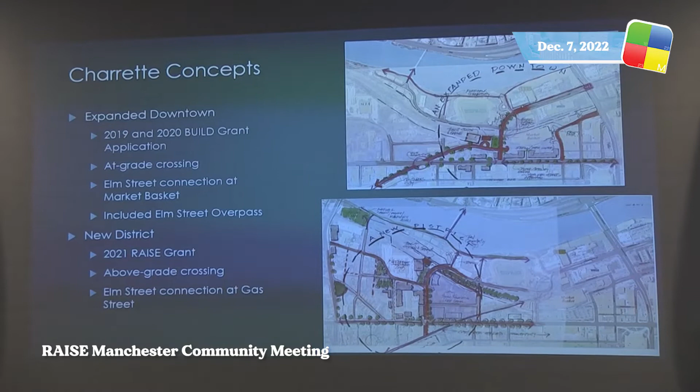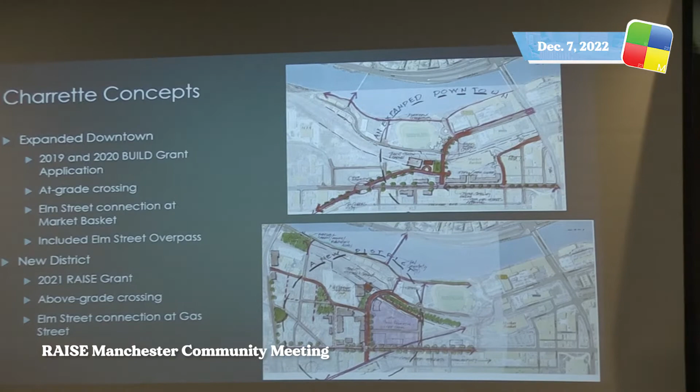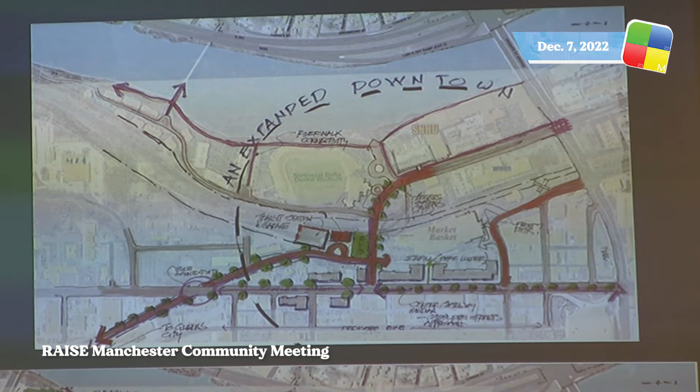These were sketches that were actually done at that 2019 charrette by the team. The first one, which was the essence of our 2019 application to the feds for this kind of funding, was what we called the expanded downtown scheme, on the top, which has the ability to support a future rail station, a transit hub right in that area, has the ability to have more housing, connects some of the streets that are missing their connections up to Elm Street, but had an at-grade crossing. So really key, the rail lines run through there and cut it off, and so that had an at-grade crossing.

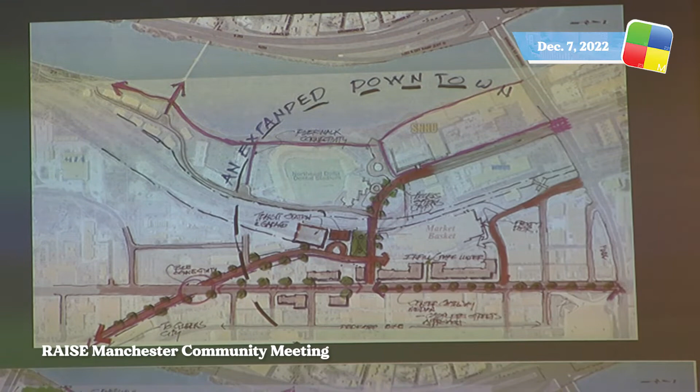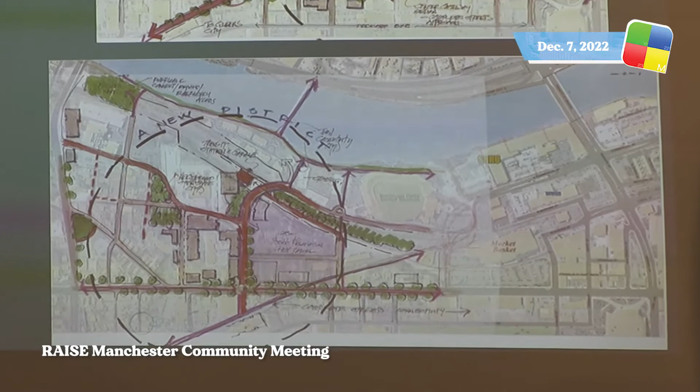As we moved forward for the next 2 years of applications for federal funding, the biggest feedback we got was, can you do it with an above-grade crossing that separates vehicles, pedestrians, and bikes out of the railroad corridor and reconnects to the rest of town? And so that's the new district scenario that's on the bottom. And that's exactly what went forward into our federal grant applications.

And I think that's a really important theme, is that we've stayed true to those initial ideas that came out in our design charrette. The other thing that happened during the initial charrette, but also during our whole process of the grant applications, was collaborating with other agencies.

This wasn't just DPW or just the city. There was a lot of partnership going on here. So this integrated with the transit-oriented development plan, in the sense of where did they have goals that might mesh with these funding goals. A really important partner was the Southern New Hampshire Planning Commission, which was with us every step of the way.

But it also ties into the whole Capitol Corridor project for rail, ties into the Transit Authority, which has a facility in this area and needs to be integrated, and works with all sorts of regional planning and local planning as well. So there was a lot of work over 3 years to make sure this worked with everybody's goals.

And so all of that led to this application to the federal government, to the U.S. Department of Transportation, for what is now known as a RAISE grant. For the couple of years prior, it had been called a BUILD grant, but I think it's important to recognize this is a program that's been around at USDOT for about 20 years. They were called Tiger grants for a long time.

And what they're looking for is really critical. It's not a typical grant. There was a pool of 1.5 billion available in the 2021 round.

The city put in a very competitive application, and the key is they're looking for surface transportation infrastructure projects that have a significant local or regional impact, with a focus on job creation, job maintenance, on really enabling people and communities economically, improving safety at the same time. I call it sort of a jujitsu grant - you have to do 5 things all at the same time and flip it. And then the other key is it has to have innovative transportation technology built into it, and it has to address racial inequalities that have been around for a long time and build in climate.

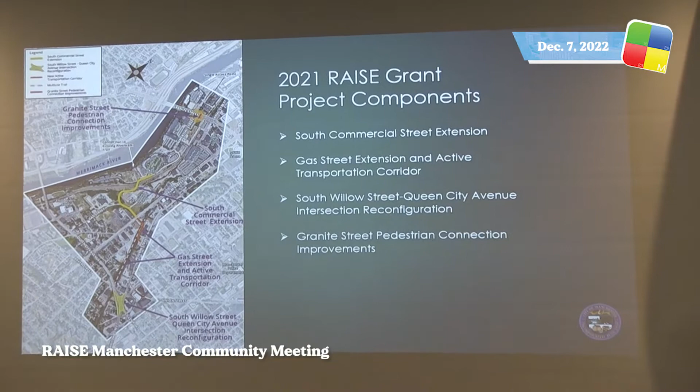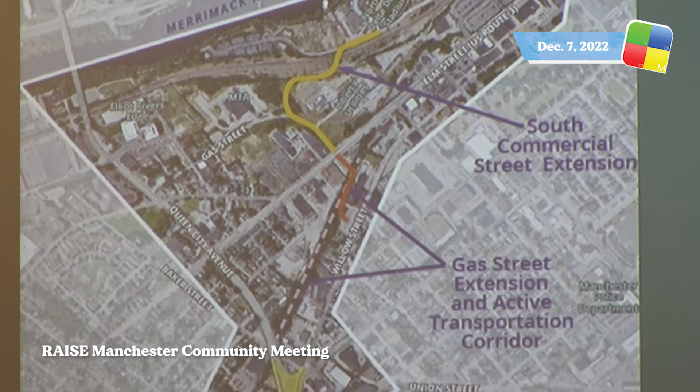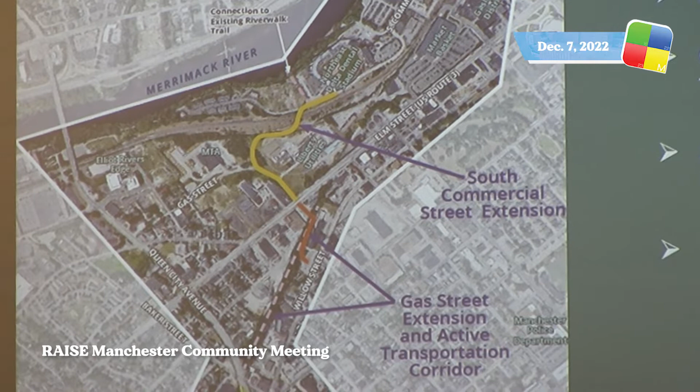The yellow line, starting where Fisher Cats will dead-end cul-de-sac there, and then it has a roadway that extends and connects to Elm Street at Gas Street. The pink dashed line provides - that's back behind Fisher Cats Stadium - that will actually provide a connection down to the Riverwalk trails. And then the orange line is the Gas Street extension, an active transportation corridor that connects from Elm Street to Willow.

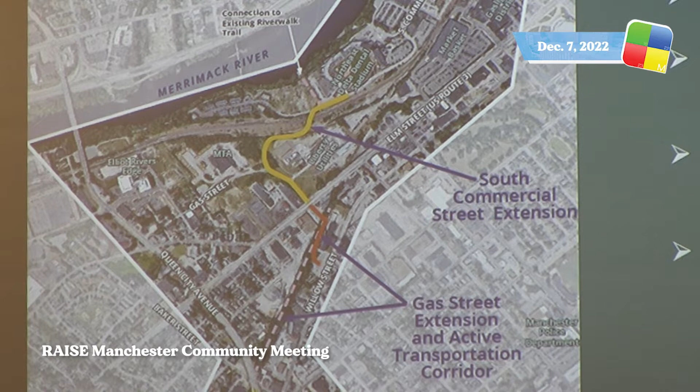The pink dashed line is the active transportation corridor - this is a fancy word for basically a rail trail. It's the abandoned rail corridor that's through there, and that would then connect down to South Willow. And then at South Willow, we are going to reconfigure the intersection to make that safer. And then the last one, and also a favorite for a lot of people during the charrette, is a pedestrian bridge across Granite Street. So I'll explain each one in a little more detail.

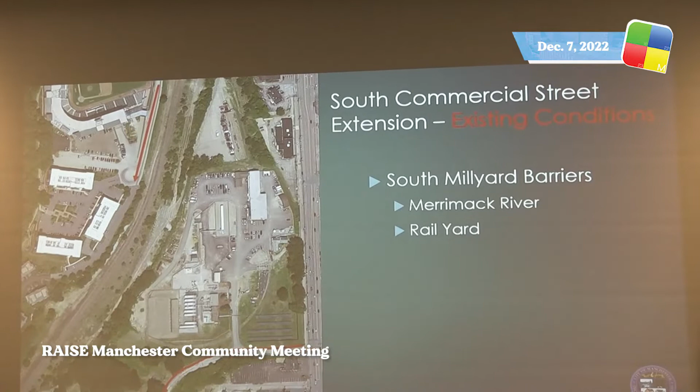So this is a picture that shows you the area of South Commercial Extension. You can tell by those 2 red lines, the only way to connect those 2 is somehow get over the rail line. That South Mill Yard has barriers - it's got the river on one side and the rail yard on the other. So no real choices there.

And then this shows you the layout of the road that we're proposing. It actually has 1 lane in each direction, but it also has an 8-foot sidewalk, so that can be used as a multi-use sidewalk - you can ride your bikes on it, push your stroller, and walk.

And the whole road is an above-grade crossing, which will give traffic relief when, like they've explained, when a train comes at Granite and Canal Street. In fact, it only takes 2 minutes of that train blocking that crossing to get traffic not just to back up at the intersections, but all the way to exit 5 and up onto the ramps. 2 minutes, not too long.

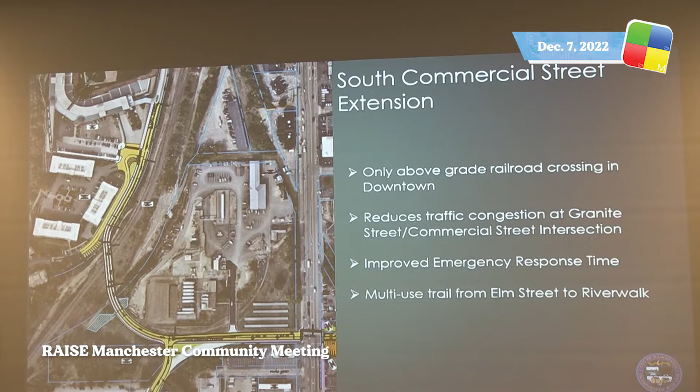The average train right now that uses this is 106 cars long, and it goes no more than 20 miles an hour. So you can imagine 106 cars at 20 miles an hour is going to take a whole lot more than 2 minutes. So there's times that the whole downtown is gridlocked because of those trains.

So the one thing that this road does, though, is give a relief valve for if there's a train - it gives somewhere for those cars on Granite Street to make a right and get out. It also gives access for emergency vehicles. If there's a blockage on Granite Street, they can't get there. In fact, the design of this reduces the emergency response time in half, not only for the South Mill Yard, but also for properties up in the Mill Yard area.

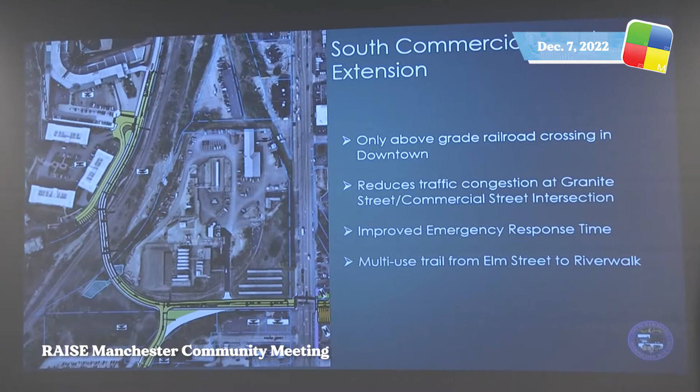And then I already told you about the multi-use trail to the Riverwalk. The road will also take traffic off of Granite Street - it takes off about 400 vehicles in the PM peak.

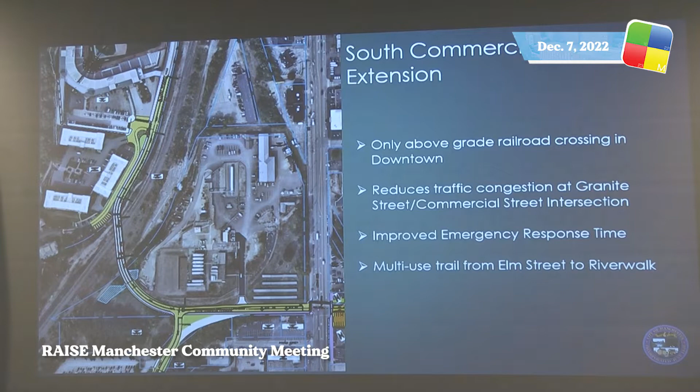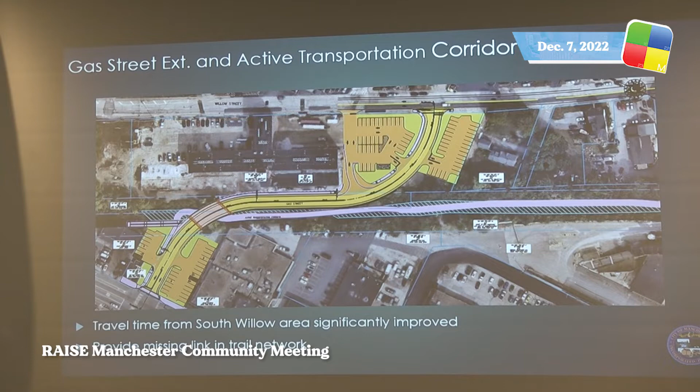Tell which streets or which? Oh yeah, so yeah, it is a little difficult.

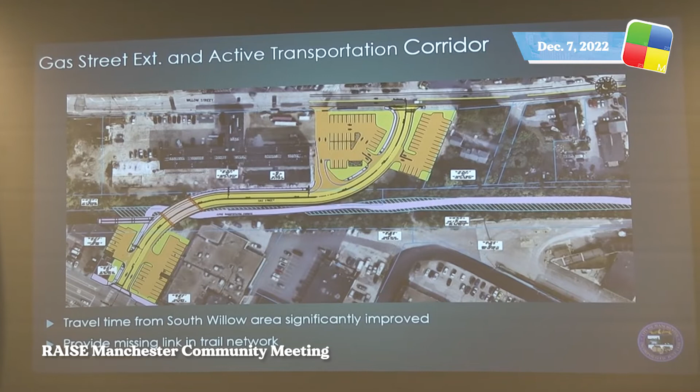So, oopsie, wrong button. Right here is actually Elm Street, and then this street that runs across the top is Willow. Where on Elm Street and Willow? Okay, yep, so this building right here is the factory up on Willow, and then this is the Sunbeam Mall, and right here, this little building is the Red Barn.

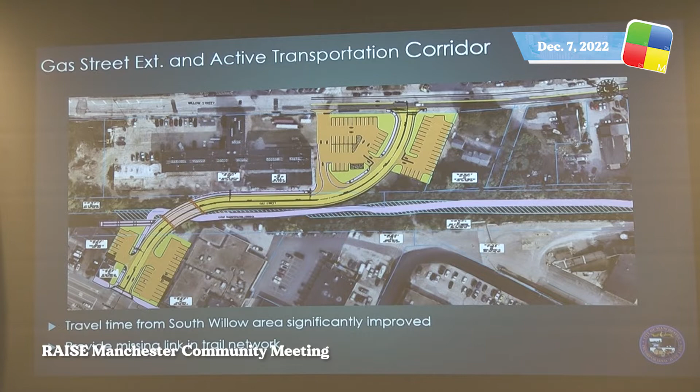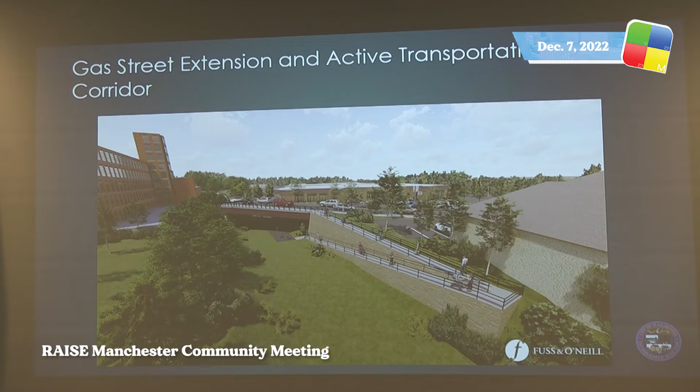And this is a rendering that shows - well, I probably should have just gone to the renderings because that might have answered your question a little easier. This is a rendering that shows what the bridge would look like that would go over the trail, and then also what the switchback could possibly look like. And then this is a rendering that shows what it would look like with the road connection.

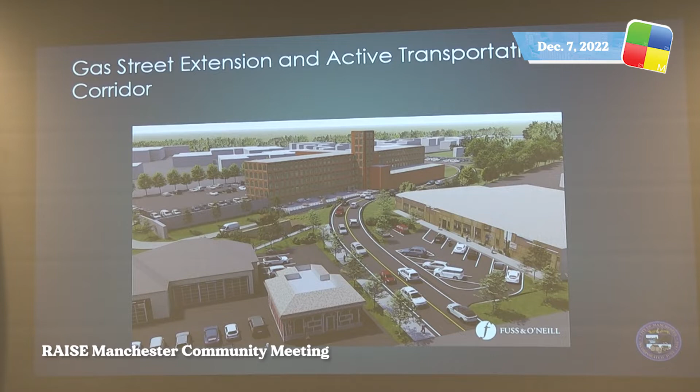So the next element is the Willow Street and Queen City intersection. Looking from above, it really looks more like a highway ramp system than a city intersection. There are concurrent movements that don't make sense when you first go through there, and long queues that happen because of the signal at high speeds with the wide open ramp system.

It is a pretty high crash location. There are approximately 30 accidents per year there, and we do know of one fatality that's happened because of speed.

So this is what we've come up with to solve it, our solution, which we call the peanut. What a roundabout does, because of the way the curves are done and the size of the curves, is reduce speed. And reducing speed helps reduce accidents.

We also have reduced delay because we know this will have no signal. The signal will be removed. With the signal removed, you don't have cars sitting there idling, and therefore you have reduced emissions.

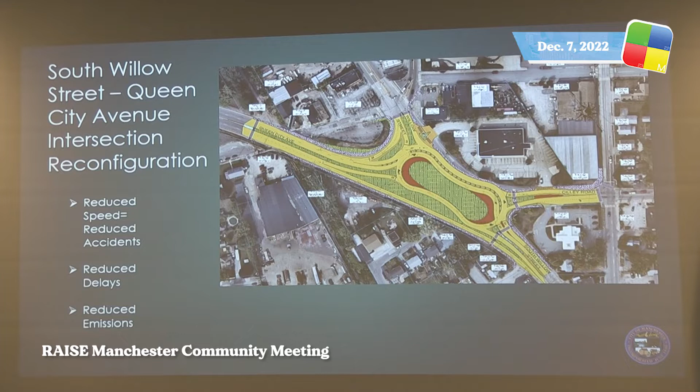I just want to let you all know that in the other room, if you didn't get here prior to us starting, there are displays up of all the things that are here, but there's also simulations of the peanut in there. One shows kind of from above how the cars would migrate through, and it also has a 3D image from the driver's perspective, showing what it would look like if you were driving it. So it's pretty cool, please stop by and take a look.

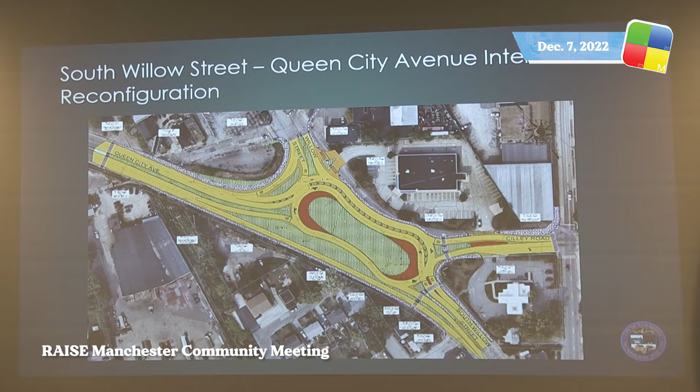And I want to let you know that this isn't the first peanut in New England. It's been done before.

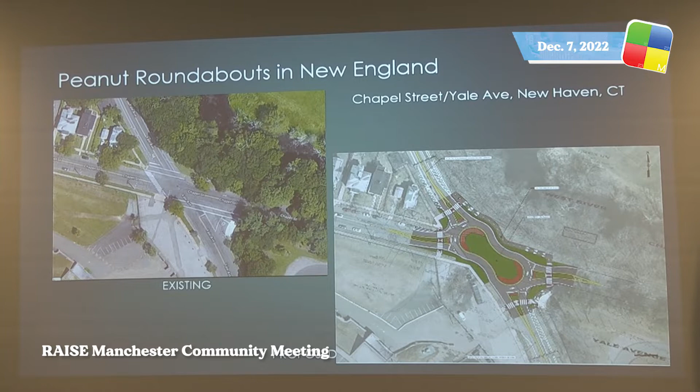And then there's one more that's not done yet, they just put a shovel in the ground and are starting construction. I found this very interesting because it sure looks a whole lot like ours when you look at the two plan views. This is in New Haven, Connecticut.

Just like Manchester, speeds were really the issue at that intersection. It experiences about 50 crashes over the past 4 to 5 years, so they are of course looking for a reduction in crashes and a safer situation. This is the intersection of Chapel Street and Yale Avenue, very close to Yale University.

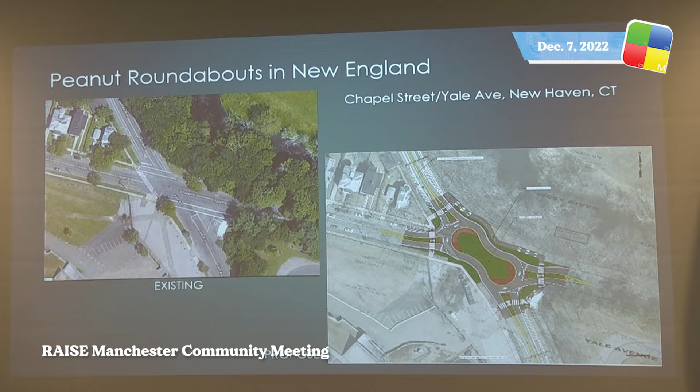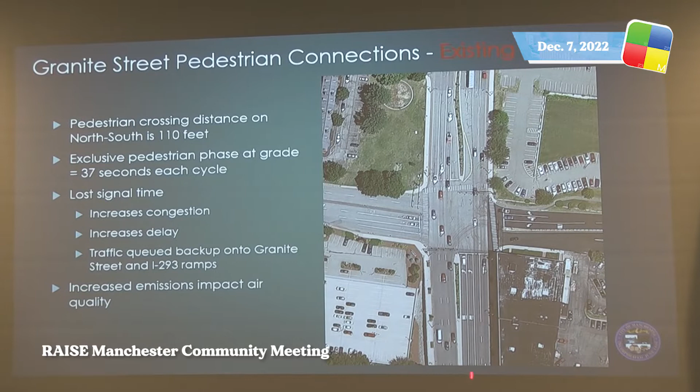All right, now to everybody's favorite, the pedestrian connection. It's a long ways to walk across. I guess we don't have things up there that say which road is which, right? So this is Granite Street, and then this is South Commercial, and this is Commercial. This is the Gateway Park area. It's 110 feet to get across from one side to the other for the north-south crossing.

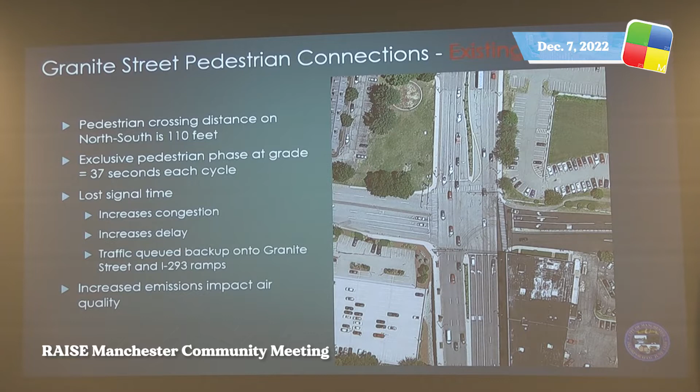As Kristen said, it's an exclusive pedestrian phase, and it takes about 40 seconds for that phase. That means all cars are sitting there at each approach with emissions going. So putting this in is much safer for pedestrians crossing. It takes that exclusive phase out and reallocates that time to the other approaches, so it's going to decrease the queues, decrease delay, and decrease the time people are sitting and the emissions.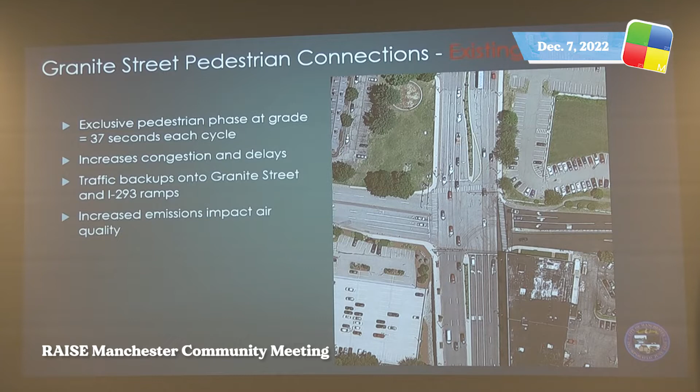And this is a quick rendering, it gives you a peek of existing and then proposed. We're still working through all the details, so this is still very conceptual, but this is an idea of what that would look like. I've already run through those improvements.

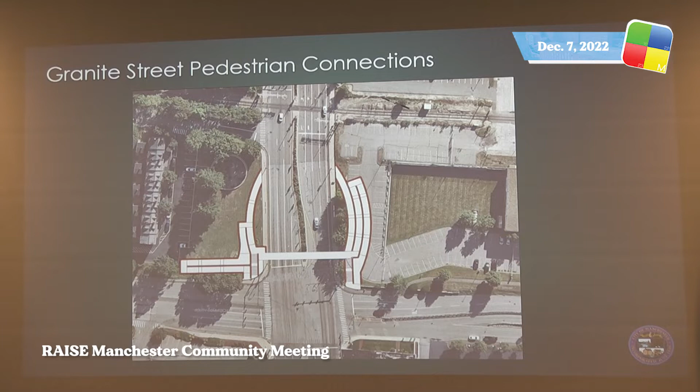And then here's a look from the top so you can see the ramp configuration. Again, we're working through environmental issues of the park. For Gateway Park, we're really looking to have those ramps integrate into a park look, and of course, we're working with property owners as well.

We really thought it would be nice to give tribute to the Notre Dame Bridge, so we are envisioning an arched bridge. Here are two pictures—it's going to be a prefabbed bridge, meaning it'll be constructed and put together at a factory, then brought out and put into place, with the ramps built after. The picture with the steps and the ramp shows ideas of how it could look, possibly for more of a park feel.

All right, so project schedule. The RAISE grant comes with some requirements—two big ones. All funds need to be obligated by September 2024, and all construction needs to be completed by 2029.

The other bullets are our plan of attack. We're targeting to get through preliminary design and have that completed this February, 2023. Then we're targeting to have final design done, being worked on from March to December 2023, to get authorization to bid in early 2024.

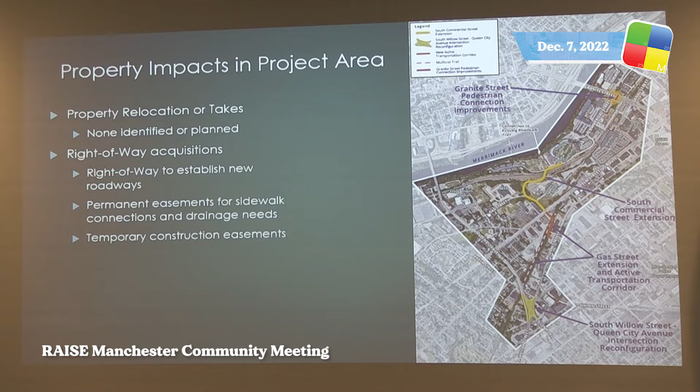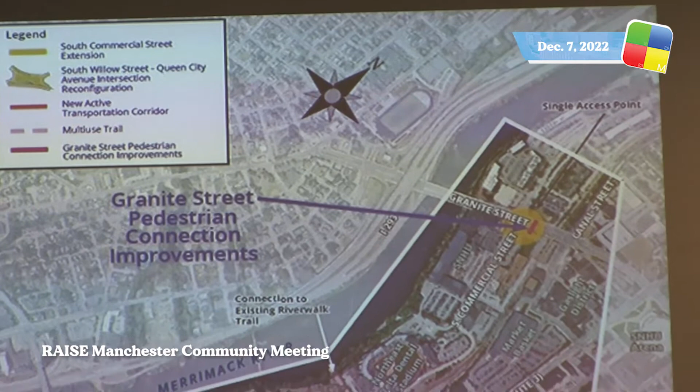Project impacts. We do not have in this project any displacements of businesses or any complete takes. We do need to acquire some right-of-way and establish our new roadway—there are places where there's no road today, so there are property owners for that road, and we need to get the rights for it. We'd have permanent easements in places for sidewalks, some retaining walls, and drainage needs, plus temporary construction easements since it'll take space to do this construction and build everything. But for all those four elements, the property impacts are pretty small.

Alright, I'm going to turn it over to Arnold. Thanks—so the property impacts are fairly direct and affect only a couple of people. One important thing is letting you know about the process we go through for looking at impacts for the community as a whole. Because this is a federally funded project, there's a lot of coordination, and a lot of making sure what the impacts are and mitigating them if there are any.

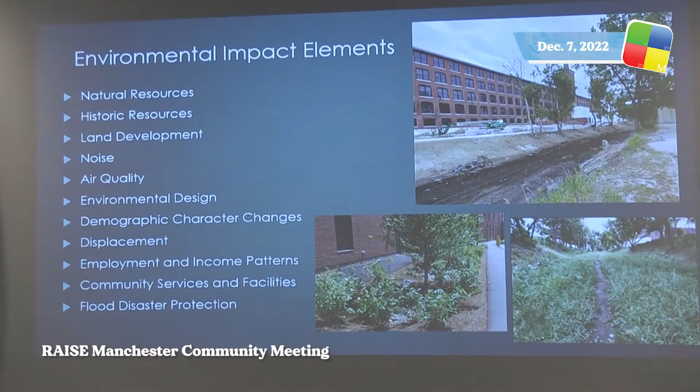On the left is a list of everything we'll go through from a project review standpoint for what we call environmental, framed very broadly. That includes natural resources, which we often think of, but also historic resources. Land development is another category—is this in keeping with the local community's land development regulations and future plans? Noise, both on the construction side and future operations—what are the impacts of that? Air quality, and environmental design—how the bridge works within the urban landscape is another factor.

And then demographic character changes, displacement, employment and income patterns—what's the impact of the project when it's built, what happens with it? There's also community services and facilities—you're often looking to see if there's a school that's impacted. One of those impacts, for instance, is to improve public emergency responder access, which falls under that category. And then we also look at flood disaster protection, stormwater, and other water factors.

So that's all built into what we do as we're designing—we're looking at what those impacts are.

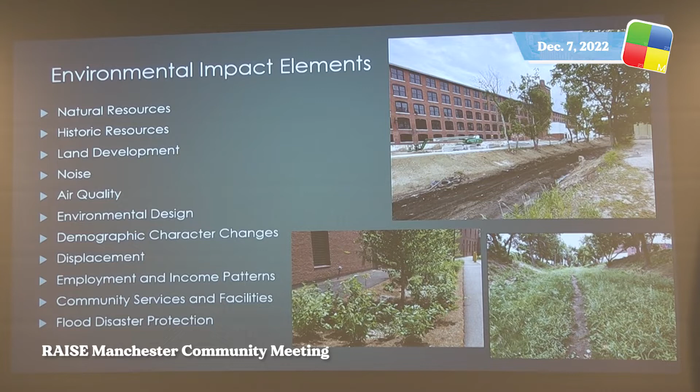I want to drill down into a couple of issues that are very common and might affect Manchester. First, we're always thinking about natural features in the project area.

Our environmental phase 1 report, which involves research rather than digging to understand what's out there in the landscape, is complete. It shows this is an urban environment that has been redeveloped many times over its history, resulting in what we call urban fill in terms of soil types and development types.

There is some contaminated groundwater. The biggest factor out there is water on the edge of the railroad right-of-ways in those old drainage swales along the railroad corridors. That's one factor our stormwater design will take into account.

For soils, we map all soils to look at what they can bear. Can they take a bridge? What's their load-bearing capacity? What's their drainage capacity? It's really loose and compressible soils in the railroad corridors.

You may have seen some drilling rigs out there in the world. That's part of this project, assessing those soils where there's a project element that's going to be constructed. We need to understand that in detail, what's out there.

Endangered species - even though it's an urban environment, you still want to look for what's out there. There's an accessible database that's used.

There's a lot of great inventory already done about species and where their populations are. Our initial search within the New Hampshire resources shows there are no records of endangered species within our project area at this point. There's also no floodplain impacts that we see.

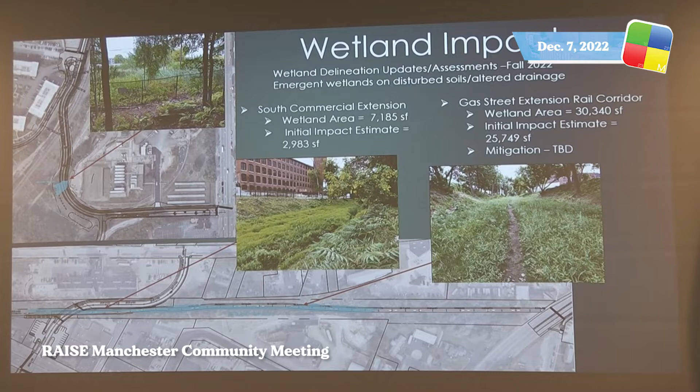And then how might we mitigate that when we do our project design, in terms of what we plant out there and how we handle stormwater, to sort of mitigate that impact.

It also shows what some of the infrastructure is that's out there. We know we'll need an alteration of terrain permit for this project, and also an MS4 permit, which is related to stormwater.

The good news is, for the few wetlands we're going to impact and where the stormwater is flowing, we're going to be aiming to do 90% treatment of that stormwater.

A lot of our infrastructure in this area was developed before there was stormwater treatment, so it's very basic. We're going to be able to do things like have good detention ponds, have deep sumps to handle overflow, and be able to do green infrastructure like tree box filters or other rain gardens out there in the field, depending on soil types.

So we'll be able to do a lot more innovative, up-to-speed things with stormwater management as part of our project design.

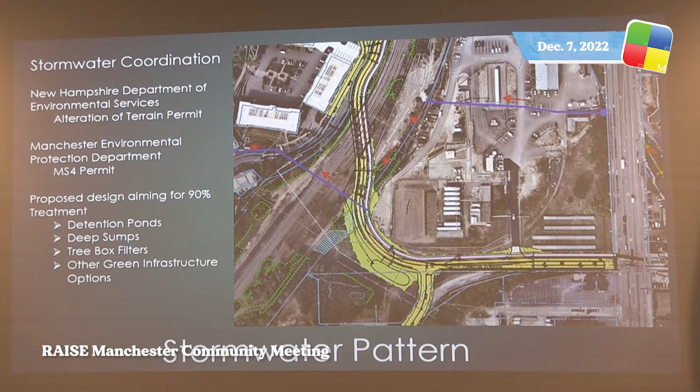And so that is a direct impact to a part of a National Register district. We'll go through a full review of what our impacts are. We've had two great discussions with New Hampshire Historic Resources Division about that. So that's another part of our review process that we go through.

So we really want to note that there is a full project website out there that you can go to. We'll be posting information as it becomes available on project design, on different things happening out there in the field, and doing updates. So you can keep in touch.